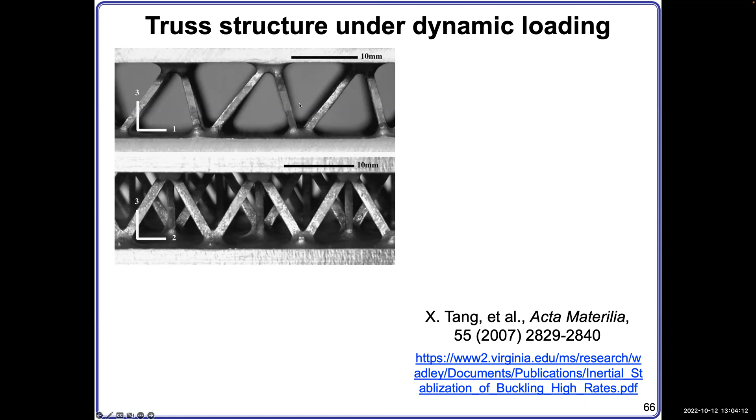So truss structure, plane truss structure means mostly 2D. Here is an example I showed before - this is a 2D truss aluminum structure and a 3D truss structure. These structures hold two parallel plates apart from each other, and can be used to sustain blast loading on the architecture. They can absorb energy, and also have the advantage of low weight.

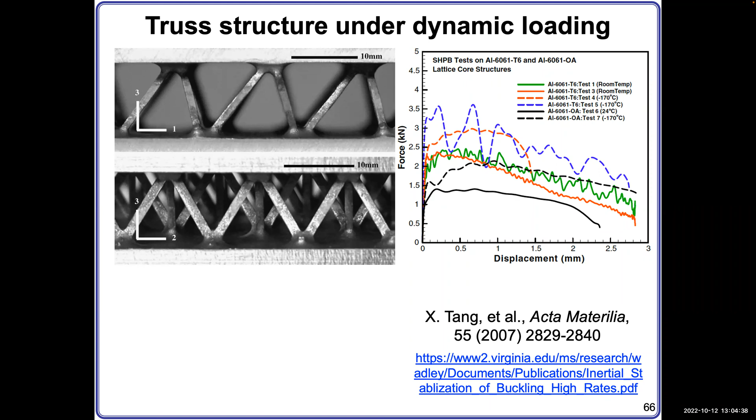This saves material and effectively resists any incoming deformation from blast loading. So these structures can be used in many areas, like satellites, boats, ships, vehicles, and also bridges and different architectures.

Okay, so many buildings in addition to the bridge also use the truss structure. If you have visited Hong Kong, there are many buildings, the banks, that are made of truss structure, and they're transparent. They use glass in the middle, and those buildings are actually very lightweight but very strong in terms of mechanics, and they can sustain earthquake, sustain blast, high speed loading.

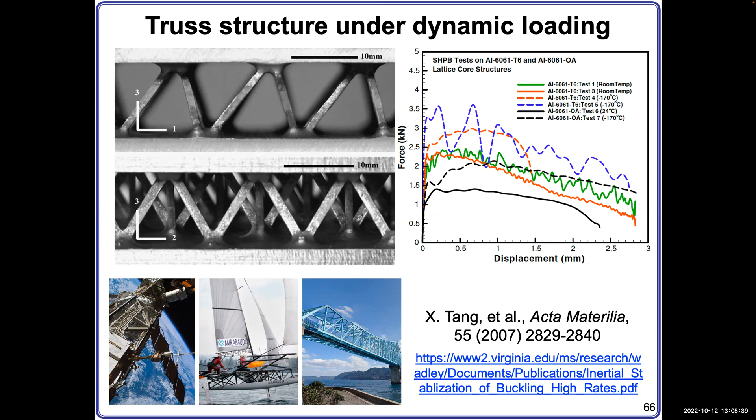So those are actually the engineering ideas that humans developed to construct all these different structures. But in nature, even without humans, nature also selects the truss structure to sustain life. In the last lecture I showed you that a single cell, at the micrometer level, 10⁻⁶ meters, generates a truss structure inside its body. Those green colored structures are actually polymers, holding the cell to stabilize its geometry, to maintain its homeostasis, to ensure the cell can sustain different mechanical stimulations. That's why truss structure actually is everywhere.

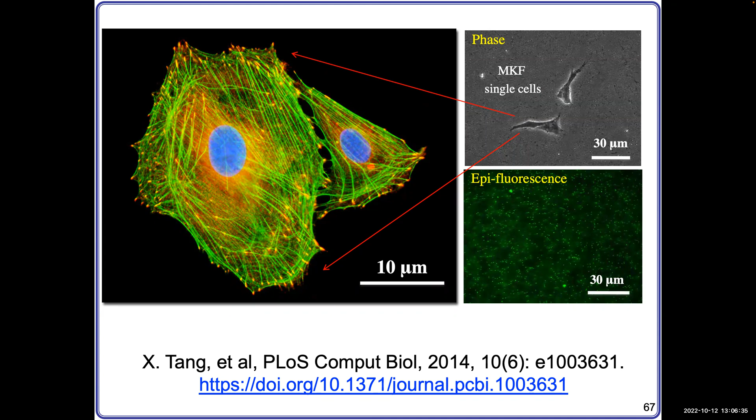From the molecular scale to the micro scale to the macro scale, like human civil life. So how to better understand the truss structure, how to use finite element method to understand the mechanical state of the truss structure - what's the stress there, what's the strain there, what's the force displacement in the truss structure - that's actually the goal of our lecture.

So there's some basic difference between the 1D system we discussed and the 2D system, the truss structure. Some differences you need to be very familiar with. Firstly, for the 2D system, they use a 2D element. This element has 2 degrees of freedom. They can move either in the x direction or the y direction, 2 degrees of freedom or 2 displacements. So they are not necessarily only on one direction.

However, in this case we are dealing with the bar structure - bar element, not a beam, bar element. As we discussed previously, it is a very thin, very slender structure entity. So the force the bar experiences, by definition, is only around the axial direction. So when we talk about the 2 degrees of freedom here, we are not meaning that for the single bar, if you look at it, it will experience a force in the y direction. We are not saying that. We are saying that for any single bar in this system, they are still experiencing, or subjected to, axial force only.

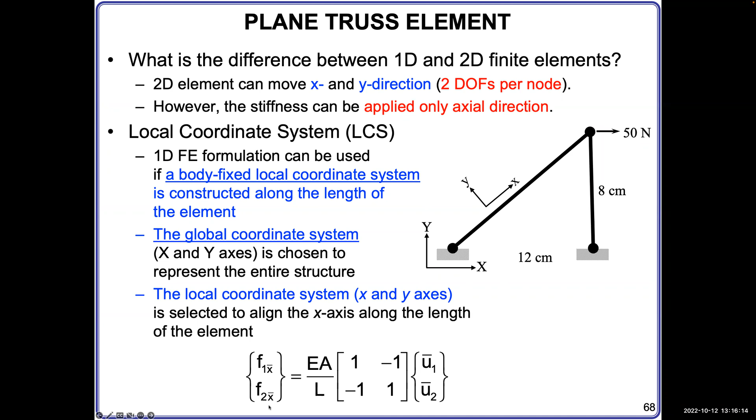So now, because of this logic, we will expand this element matrix formula. We will add the y degree of freedom. The way to do it is we add F1y bar, F2y bar, and then V1 bar, V2 bar, where V means displacement around the y direction. So we expanded it to a 4 by 4 matrix, for one bar element.

Each bar has 2 nodes, each node has 2 degrees of freedom, so altogether 4 degrees of freedom, 4 forces. So we will have this equation set. This is called the 2D element equation, within the local coordinate system, as we drew here, x bar, y bar. Okay, can you guys hear me?

Yeah, very good. So this is very basic, very simple. But many students need to practice it until they can master this. That's why we go through it slowly.

Now, once we have this equation set, we already know we can write it in abbreviation manner, with K bar. The top bar also means this is a local coordinate system. And this element stiffness matrix has the following property. This is the same property we discussed previously, only difference is now it's in the local coordinate system.

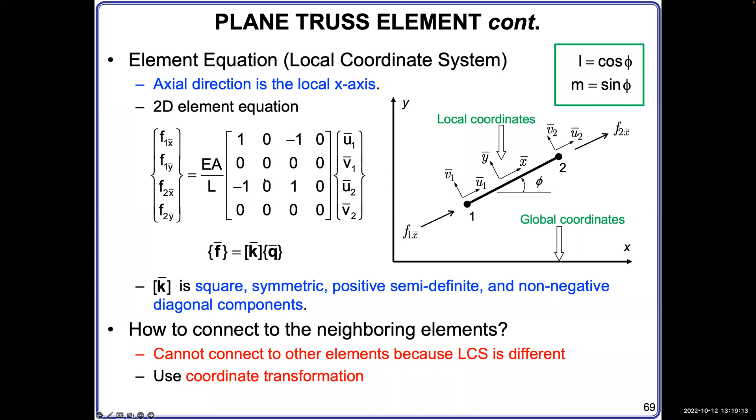Now we have this element matrix, and we are going to convert it into the global coordinate system. In last lecture we already discussed that if you have one coordinate system, U and V, and the coordinate system rotates counterclockwise with the angle phi, it becomes U bar and V bar.

Then any displacement within the U bar, V bar new coordinate system can also be written in a way that they are in the original coordinate system, U and V. These two, the same vector in one coordinate system, can also be written in another coordinate system using the correct relationship of angle. So for U1 bar, V1 bar, it can be represented in the U1, V1 system by multiplying with this 2x2 matrix: cosine phi, sine phi, minus sine phi, cosine phi.

We explained this in last lecture using chalk, drawn on the slides. You can go through that process and you will understand this important relationship.

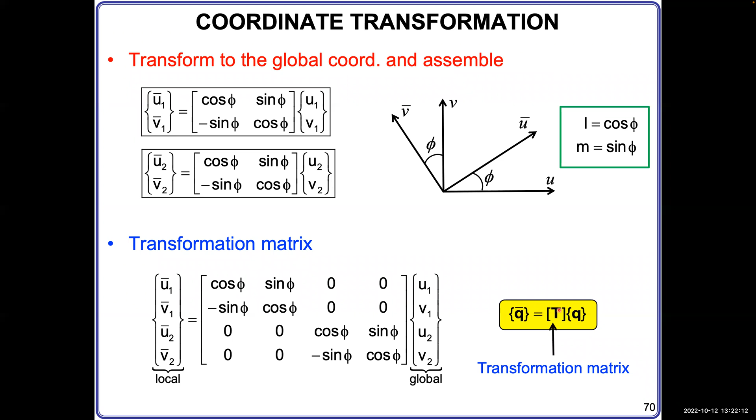This matrix is called the transformation matrix, and we can write it as Q bar equals T Q. So this is the important equation.

We have discussed that the same transformation can be used for the force because they are all vector transformations. So you can use the same way to convert global to local and local to global. And that's why this T is important, this transformation matrix T is important.

And this T actually has some very unique properties: its inverse equals the transpose of it. So in this case, F bar equals T times F. Also, we can multiply the inverse from both sides, and then F bar times T inverse equals F. We can rewrite it as F equals T inverse times F bar. And T inverse equals T transpose, so that means F equals T transpose times F bar.

So by transposing this transformation matrix, you can convert degrees of freedom or force from global coordinate system to local coordinate system or vice versa, just by transposing the transformation matrix. That's the beautiful part, very systematic. Any matrix with this property has its inverse equal to its transpose.

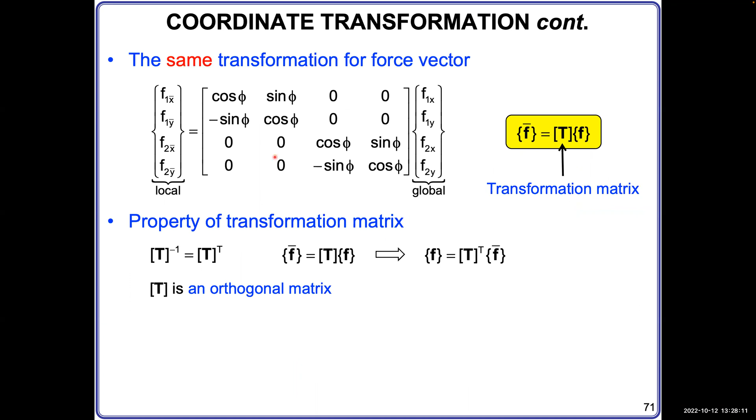Yes, excellent. So we know T. Now we can calculate what is K. We'll find out after the calculation—you can practice it. After you add the numbers in, you will get this K.

This K, remember, contains both matrix components as well as the material properties here, because this is the bar element—we have EA divided by L. Make sure when you do the homework and exam problems, those numbers are all included there. This is important. Here, EA is the axial rigidity, and this matrix has some important properties we discussed last time.

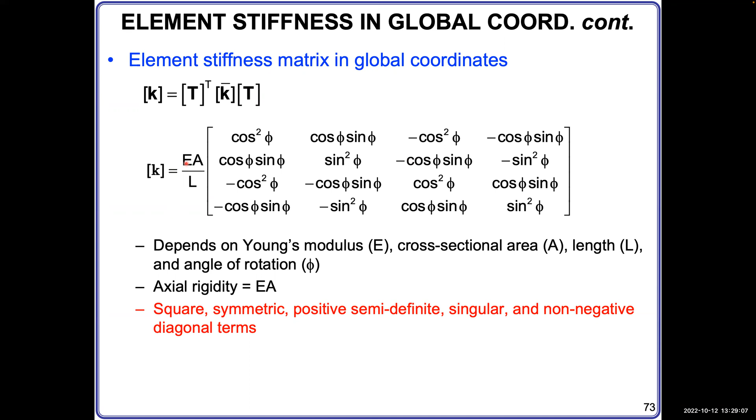Once we have this, based on the data provided in the question, you can start to add the quantitative numbers in, like the material properties and geometry properties. Here you can see in the problem they usually give you the diameter and Young's modulus—the diameter gives you the area A, and Young's modulus is what you can use directly. The dimensions are also given for these 2 elements.

One is 8 centimeters high and 12 centimeters wide. From here, from these 2 values, you know the angle theta. From theta, you can convert the local coordinate system around element 1 into its global representation.

Okay, so for element number 1, you first write the connectivity. You write N1, N2, and N3. If you write N1, N2 in this way, then the angle is arctangent of 8 divided by 12. If you select it another way, N1 here, N2 here, then the angle will be different.

So the angle will be from this line with respect to the horizontal, and it's larger than 180 degrees. That's also fine, you can do it that way too. Then theta will be different, and the calculation will be different, but the final results will be the same.

To keep it consistent, we recommend you denote node numbers from left to right, as we did in the 1D spring system. This way it will be very difficult to make mistakes. Based on this, we can construct a local coordinate system, and first construct the element matrix.

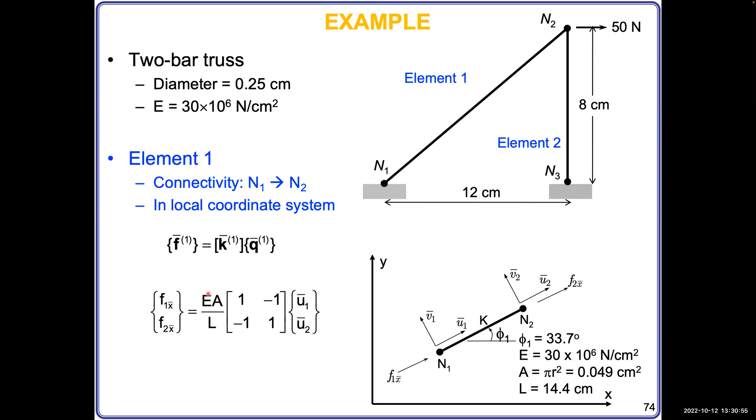From here you can write it expanded to 2 degrees of freedom for each node, and then calculate the element stiffness matrix in the global coordinate system, which looks like this. Then you add the numbers given in the problem into the equations, and you'll have these numbers in. From those numbers, we already can hold it here first, and this is in the global coordinate system.

Let's go directly and repeat the same process for element number 2, and get the representation in the global coordinate system, so the two equations can be assembled together. For element number 2, you have this way.

You have N2 here, N3 here, following the direction N2 to N3, pointing downward. The angle of this x-axis with respect to the global coordinate system is minus 90 degrees.

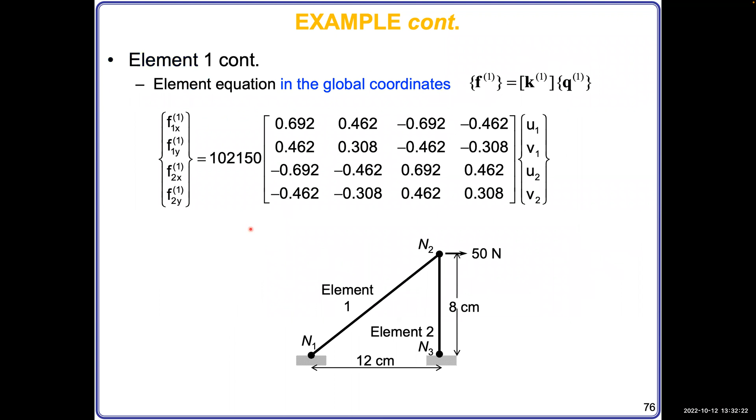Then you can construct the local coordinate system element matrix, adding the minus 90 degree angle in, following this equation, you can get the K for the second element. For the second element, you can calculate that.

Then you can add that together, which is this one. You will have this number for the second element, after adding sine and cosine with phi equal to minus 90 degrees. Then you can combine the two element matrices together.

The only overlapped part will be the U2, V2 location, because that is node number 2 where the two elements actually combine together. When we combine them, the displacement remains unchanged because it's shared by different elements, and then we add the force together.

Once the forces are added together, we know based on force equilibrium that all those internal forces added together equal the external force. So we can write it as the external force, capital F2x, capital F2y.

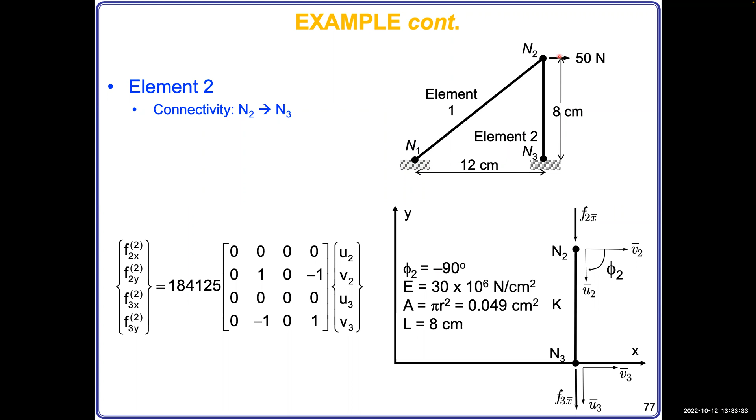Based on the boundary condition at node number 2, we have F2x equal to 50, F2y equal to 0, external force. So for node number 2, we have the force boundary condition and displacement is to be solved. For nodes 1 and 3, displacements are fixed, no displacement, and the forces are unknown, to be resolved.

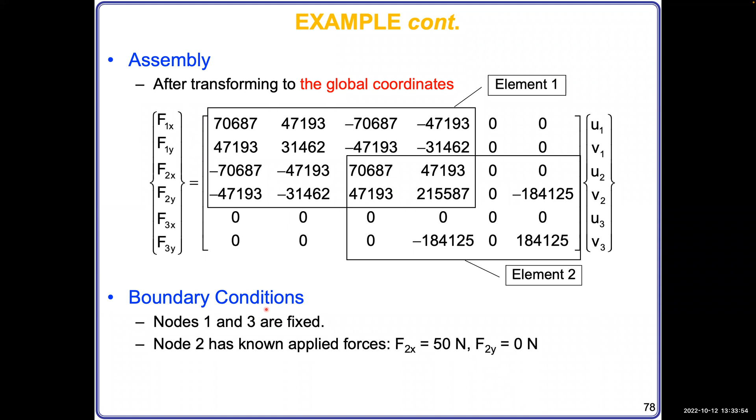Then we can apply those boundary conditions into the equation. You can see the unknown forces are listed, and the unknown displacements are listed, and all the elements in the matrix can already be converted into quantitative data.

Following the same method we learned before, we strike out the rows corresponding to the unknowns on one side, and put all the unknowns on the other side that contains the matrix information. Computers can solve those matrices easily.

They can quickly multiply the inverse of this matrix to one side, and then both sides, to solve those unknowns. The computer is more suitable for calculating those kinds of equations. You can use MATLAB to solve this.

From here we can get U2, V2, because we have two unknowns and two equations. So U2, V2 is resolved, and we can put that U2, V2 in. We can directly solve the reaction force on the two nodes fixed to the ground, F1 and F3.

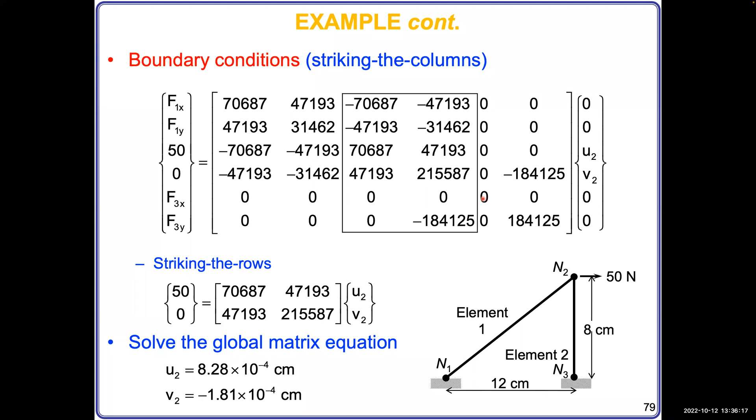So we already know, using the transformation matrix, we can convert displacement from the global coordinate system into the local coordinate system. We already discussed about it. Now you put this number in.

You now know the global displacement, U2, V2. Global displacement at node 1 is all 0, because this is an anchor there. Then by multiplying this 2x4 matrix with the 4x1 matrix, you get a 2x1 vector.

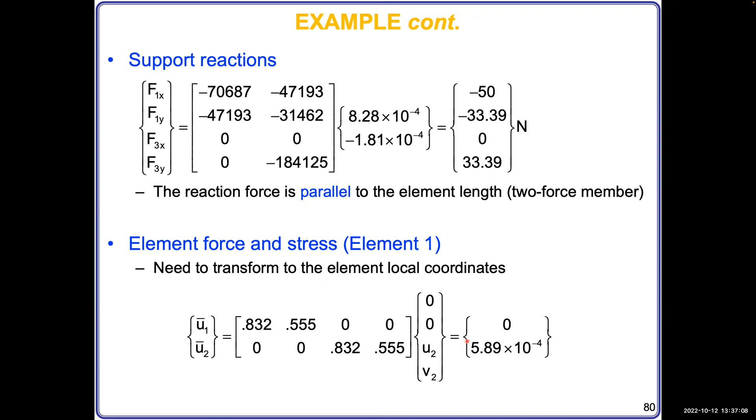So that 2x1 vector is actually the displacement in the local coordinate system for element number 1, which has node number 1 and node number 2. Once you know displacement, we also know the material properties of that element, right?

Then we can put that displacement into the element stiffness matrix, and we can directly calculate the force there, the force applied to the two nodes, node number 1 and node number 2. In the local coordinate system, we find the force equal to minus 60.2 and positive 60.2.

That's accurate because these two numbers should be in equilibrium, right? So for the two nodes by itself, this is the equilibrium part. You can see there's no force component in the local y direction, and in the x direction the two forces are equal and opposite, okay?

And the force in the second node is equal to the element force. That's by convention. In the second node, the force is the element force.

Once we know the force here, we can also calculate the stress. Stress is the force divided by the area. We know the diameter, so we know the area. So when we calculate it, we get the stress there.

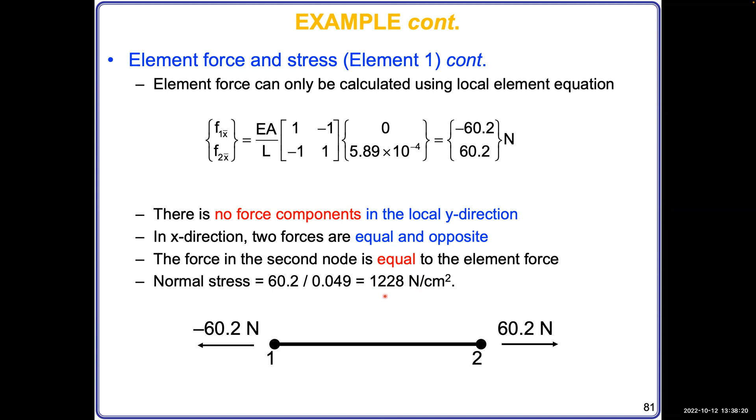So then we get the complete information in the system. The element force is calculated by the displacement change, right? Using Hooke's law, we can calculate that.

And this is in the local coordinate system, okay? Because we use UJ, UI with bar, local coordinate system, we can calculate those element forces. And this element force can also be viewed in the global coordinate system.

The way to view it is we calculate the force using the global displacement, but the number will be the same. The force is still there, still along the actual direction of the bar. It's just a different way to calculate it.

If you directly use the displacement in the local coordinate system, it's very straightforward: you use the two displacements and calculate it. But if you want to use the global displacement you measured, that's also fine. You just need to convert global displacement UJ, VJ into the local coordinate system by multiplying with the direction cosine.

This is actually the same thing we discussed during the transformation matrix. So UJ bar equals L times UJ plus M times VJ, and UI bar equals L times UI plus M times VI. L and M are the cosine and sine in the transformation matrix, the same way.

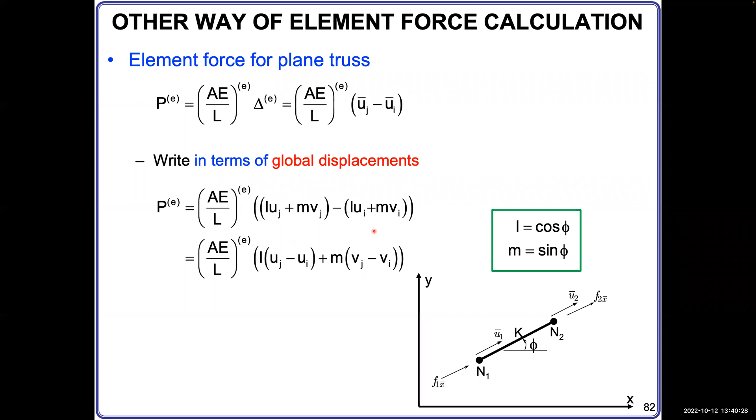Okay, so here is one example. You can give it a test. This is the element, the displacement, the material property and the node connectivity, all listed here.

When you do the homework and the exam problems, I suggest you follow this using the same style of table. Write down all those things correctly: the different angle between the element and the global coordinate system, and the corresponding L, M. Once you assemble this table, following the method we discussed, you can solve any different truss structure.

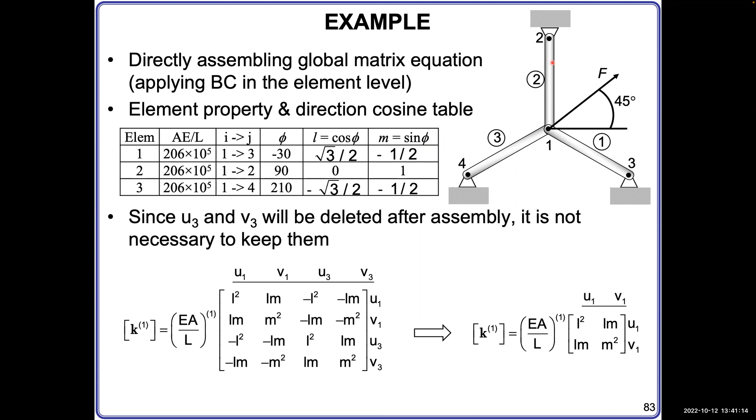Okay, so that's all, and here is one more example you can use to resolve. Now you are able to solve those 2D structures and find out their individual mechanical state. That is excellent, so you can do those examples now.

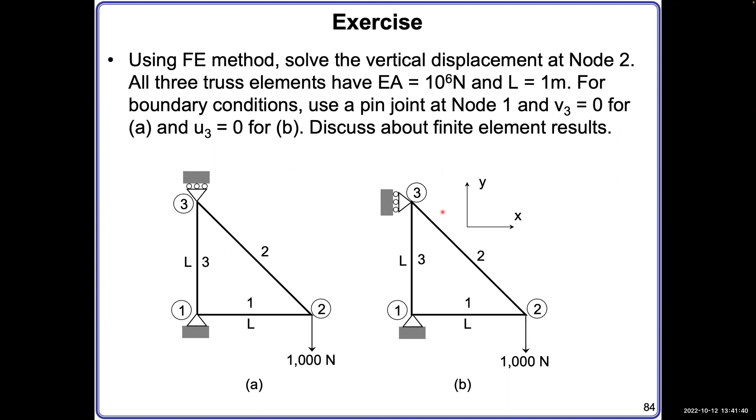Next lecture we will start to talk about 3D structure. There's this kind of architecture that uses 3D structure, but the principle is the same.